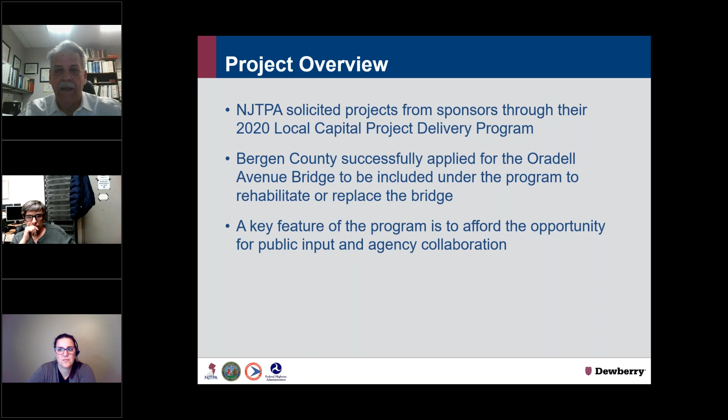As I mentioned, and you'll hear throughout this, a key component of the NJTPA's program is making sure that the public is contacted and that there is collaboration between the public and not only the agencies, but this team.

We're really early on in the project's life. We're in the concept development stage, so we are here gathering information, gathering physical data in the field, and assessing the condition of the structure itself. We're making sure we gather information regarding not only the physical elements, but also the environment the bridge is in, so that once we complete the concept development phase, the goal is to leave this phase and graduate the project.

We want to make sure there are no fatal flaws. We want to make sure that the solution arrived at -- the preliminary preferred alternative, as it's called through the local concept development -- has been vetted, is the most prudent and effective way to go engineering-wise, and that it has public support. So that when the project advances further into preliminary and final design, and ultimately to construction, there are no fatal flaws, that the public has in fact been listened to, and that the purpose for this project and its need has been effectively dealt with.

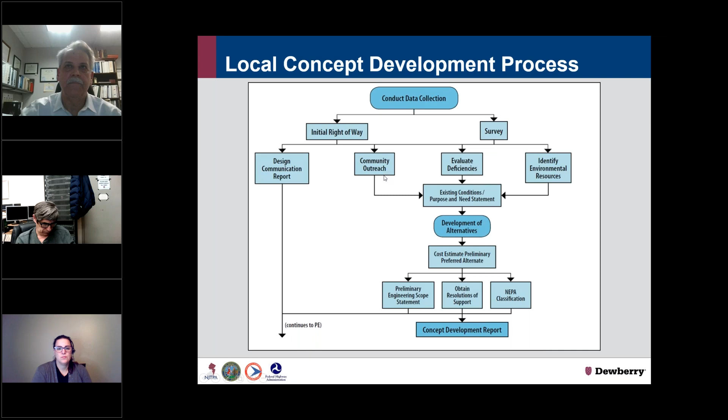Just another quick flow chart to show where we're at. If I drew a horizontal line across this slide, we're just above the development of alternatives stage. We can't develop alternatives until we gather data, and a big component of that is gathering community input. The project has federal funds, so we need to comply with NEPA documentation, which also stresses public input and community outreach. As we gather physical data on the site, that includes physical information regarding the environment.

As we'll get into, I'll show you some slides. This project site, probably as well as I do, if not better, since you're living in the community — our goal is to make sure we minimize or avoid impacts to the surrounding environment.

A quick overview before we get into the project itself. The Oradell Avenue Bridge, as probably everyone on the call knows, is a critical link because Oradell Avenue is a major east-west corridor, extending from Grant Avenue on the east side, crossing the Hackensack River, crossing Kinderkamack, and carrying traffic from the more heavily residential side of Oradell to downtown and the other residential side, but also carries traffic beyond to Route 17, the Parkway, etc.

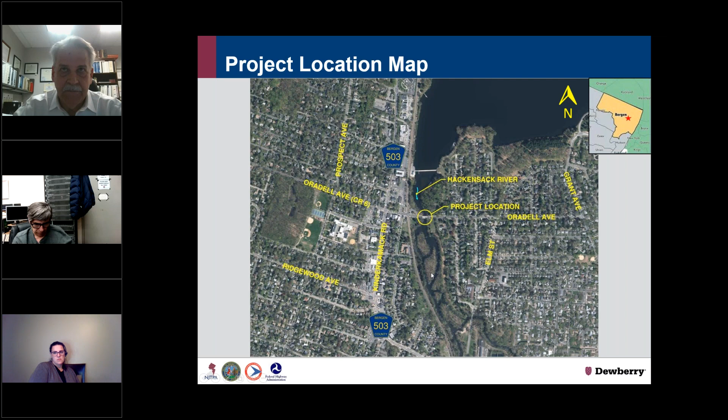Zooming in to the project site, this will give you a snapshot of the property immediately abutting the bridge. Again, it's dominated by the Hackensack River and the linear park, which is Bergen County owned property. The Oradell train station is immediately west of the bridge site, and the Pascack Valley line runs north-south immediately west of it. There are commuter lots, and a sidewalk carried along both the north and south side of the bridge for people who want to walk into town or to the train. So there's a lot of uses this structure is required to function for — not only vehicular traffic, but pedestrian traffic and utilities, as I'll show you in a bit.

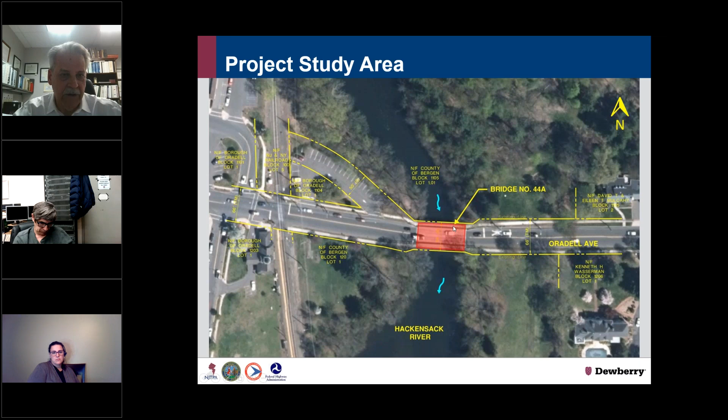The bridge itself was built in 1904. As bridge designers, we'd love to get 75 to 100 years out of a structure as the current goal, so this bridge has far exceeded that at 117 years. It's been rehabilitated over time — it doesn't last 117 years without some work done on it. Bergen County did work in the 70s as well as around 1995-96, but that's still 25 and 50 years ago. So the project is driven predominantly by the deterioration of the structure itself.

It's a single span bridge, but the overall length is about 100 feet, with a span of about 93 feet. It's what's called a through girder, and I'll show you a cross section in a moment — as you drive across the structure, you'll notice the two large green elements that stick up out of the deck. Those are the girders, the main supports carrying vehicular traffic down to the substructure.

The substructure consists of two masonry abutments that support the superstructure.

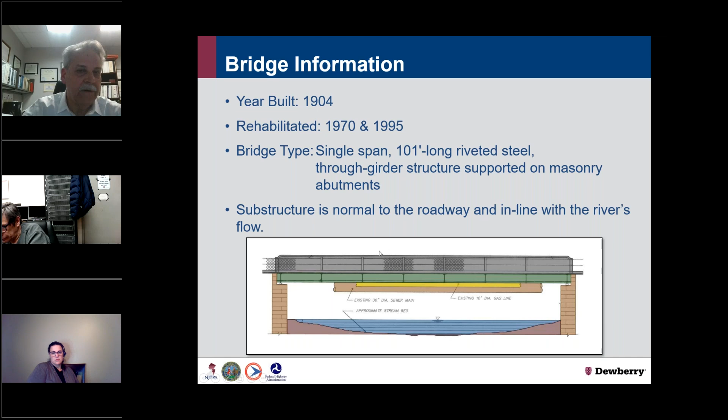The bridge carries Oradell Avenue, which has a 30-mile-per-hour speed limit. It does have a lot of traffic, 25,000 vehicles per day. It's a heavy corridor, and that is recognized.

The bridge itself is a little bit narrower than the approach roadway. It's only about a 29-foot clear roadway, where the roadway on either side, curb to curb, is in the neighborhood of 40 feet. This is what I meant before when I called it a through girder bridge — you'll see two main elements, the two main supporting girders that carry the vehicular traffic, support and deliver the loads induced on this structure down to the substructure, down to those masonry supports.

Outboard of the vehicular traffic, there's a sidewalk on either side to carry pedestrians. As I mentioned, this bridge also supports utilities. There's a 36-inch sanitary main supported beneath the deck, and there's also a gas main supported on the bridge.

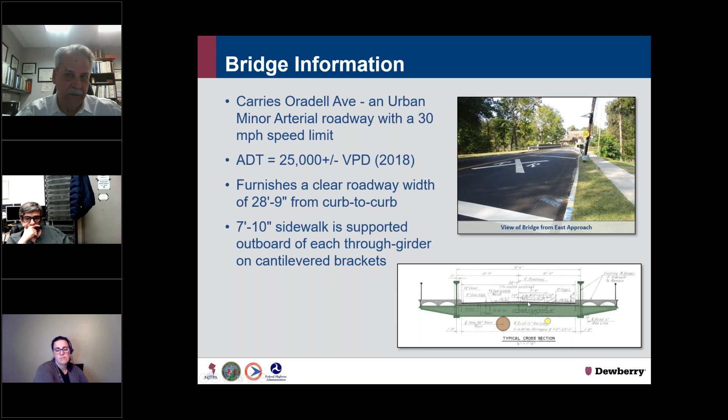As I mentioned, a little bit about the project site itself — we know that the bridge is critical, it's a vital link in the area. It's surrounded by property owned by Bergen County. The Hackensack River stretch here is in essence a park, but it's dominated by the flows of the Hackensack River. The areas surrounding can also be potential sites for endangered species.

Often we will look at bridges that are on the navigable waterways as having tidelands grants. So that's also an influencing factor that we will look at.

In addition to the physical environment, there's also significant cultural resources in the area. Although the bridge itself is not considered eligible for listing on the National Register, it is within the immediate confines of other historically significant elements — one being the Oradell Railroad Historic District, and there's also an Oradell Avenue Grove Street Historic District that is there.

So as we're developing alternatives and coming up with solutions for how best to address the condition of this structure, the project needs to account for these natural setting environments, not only the physical environment but the built environment, to mitigate any impacts on those elements.

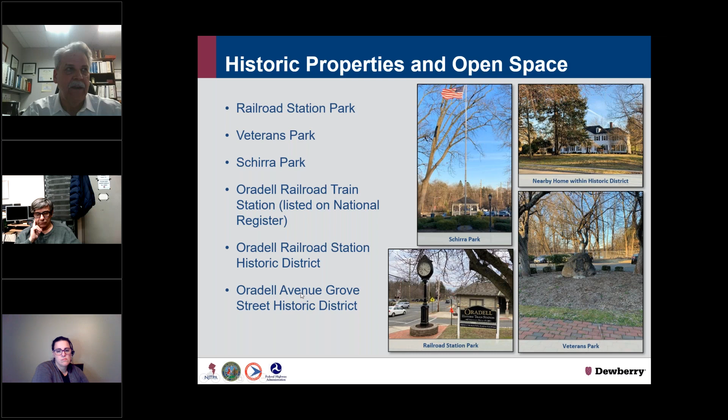In addition, I mentioned that not only is the property along the river a park, the area abounds with parks. This tiny little area between the commuter parking lot is actually a park setting. Wally Schirra Park is immediately west of the railroad station as well. So those are also historic or significant properties that need to be mitigated in the event of any impacts to them.

Just wanted to show you a quick constraints map, as we call it. This map basically zooms in on the area around the bridge. Everything shown here is information or data that's readily available to us from the NJDEP's website and database. You can see again how the area is dominated by the Hackensack River, and as expected, that corridor along the river is potential habitat for endangered species and nesting birds, which all need to be weighed in as we develop alternatives.

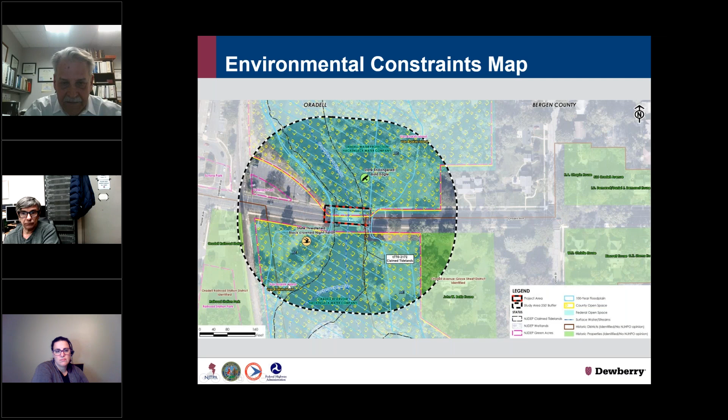As I mentioned before, we've got commuter parking here, as well as further in across the tracks. This tiny little triangular property here is actually park, as is all the abutting property.

Just a few general photos of the project site — looking east from the bridge, looking west from the bridge with the railroad to show you the immediate proximity of the railroad. There's also the immediate proximity of the driveway that provides access to the local community parking, and this is the area of the park.

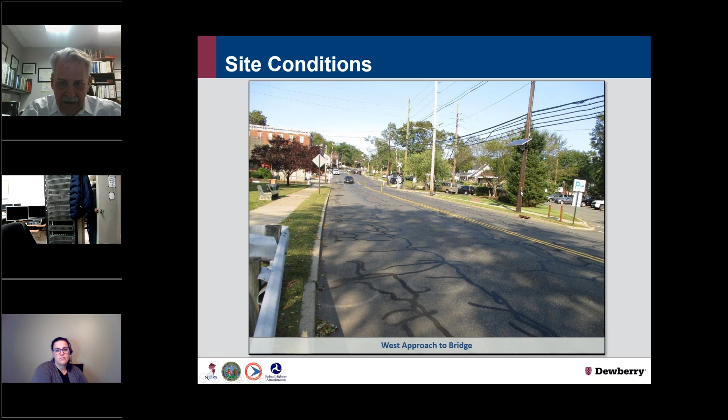Now, as I mentioned, the bridge also supports utilities, which are critical. So it serves not only as a link for vehicular traffic, but also a link for utilities. It carries a large sanitary sewer main, in addition to the gas main, and there's also a water line that actually extends below the Hackensack River on the north side of the bridge.

These are also elements that, as we're developing alternatives and investigating this structure, we need to make sure we accommodate. These are all vital utilities. We work with the owners, we speak to them, we gather what information we can, so that as we're weighing the pros and cons of alternatives, these are accounted for.

As I mentioned, there are two utilities already supported on the structure. There's also overhead lines, which must be accommodated. You can imagine working on the structure with these lines immediately adjacent. We have to avoid impacts not only to the physical lines, but also make sure we comply with high voltage proximity acts, etc.

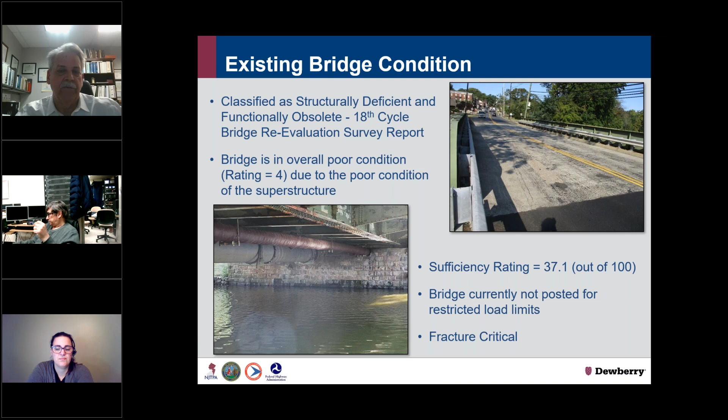The bridge has 2 main carrying girders, and as such it's identified as a fracture critical structure. That means simply that if one girder were to fail, the system has no redundancy — the loads that girder carries aren't transferred to any other member to carry them down to the substructure. In essence, the structural system fails. That's why 2-girder systems are more of a concern to bridge engineers than multi-girder systems, which have that redundancy.

Again, the project today is being driven by the condition of the superstructure of this bridge, the physical condition of the girders that have been here since 1904. Just because they've been here since 1904 doesn't mean we should get rid of the structure in its entirety, but we need to be cognizant of what's driving the conditions.

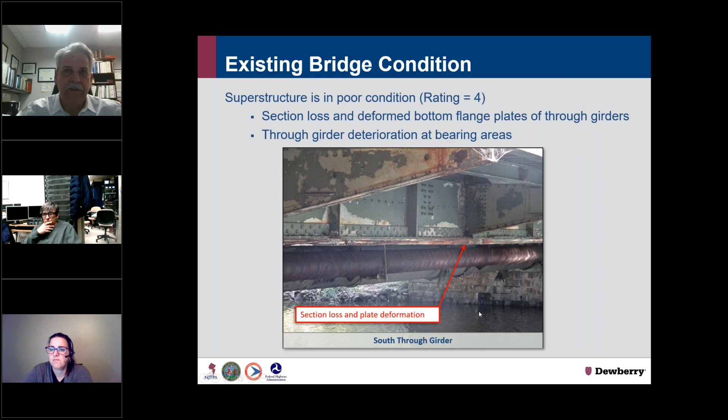The structure itself, as you can see here, is as you'd expect — anything that is steel and exposed to the weather for 117 years is going to be subject to deterioration. You get what's called pack rust; you can see this is a built-up member, and that rust causes problems with steel members, as you all know. The masonry substructure is also being eroded.

The bridge passes a lot of water that comes down over the spillway from the Oradell reservoir and sees high flows. Over the years, those flows erode the stones and the mortar, and you see signs of degradation as a result.

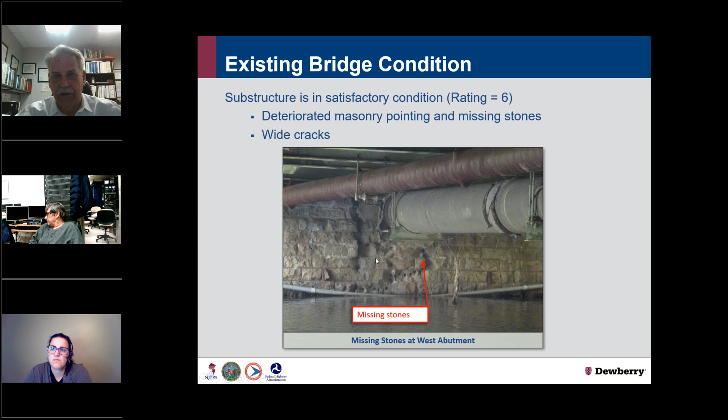Now, as I mentioned, we're here because we've started this data collection process. We've developed a public involvement action plan, which said we need to make sure we go out and speak to the public. We met with local officials and got their initial concerns, and then met with stakeholders, as Nicole said. We're here tonight to do that exact same thing with you — to solicit your input, answer any questions we can, and make sure your voice is heard and involved in this process.

Some of the concerns that local officials, stakeholders, utility owners, and the public in the immediate proximity raised are likely the same ones you have. Closing this bridge long term is a significant concern — everyone uses the structure, and you want to see traffic flow maintained and pedestrian service maintained across the river. Another key issue is emergency service: emergency services in Oradell are located on the west side of the river, yet there's a huge residential community on the east side.

We want to make sure that those emergency services are addressed as we develop these alternatives. Similarly, you've got schools on both sides. St. Joseph's School was one of the stakeholders who participated in our last call. We heard from them. We wanted to make sure that New Jersey Transit's operations are also not impacted, not only from impacting the transit itself, but you also have commuters that use that line.

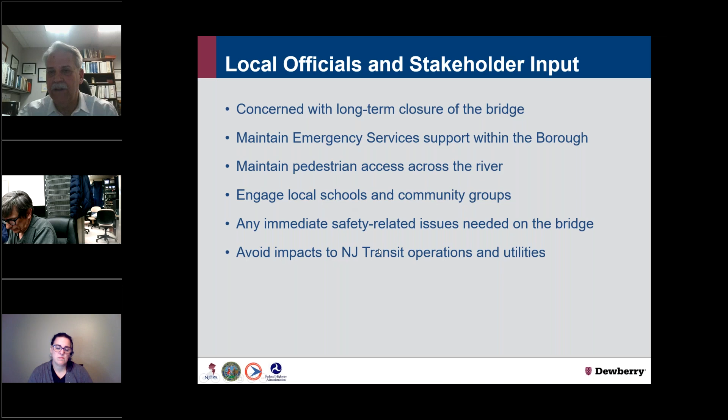I highlighted a little bit earlier about purpose and need, and it being a critical document for us to develop. Purpose for projects that are bridge related are often very easy to document. It's generally driven by the condition of the bridge, and that's what's driving this project. That is in essence the purpose of this project, to make sure that the structural integrity of the bridge is maintained and or restored so that there are no more concerns about it for the next 100 years.

The bridge is also defined as functionally obsolete, and that's being driven solely by the fact that the approach roadway to it is 40 feet and we're necked down to about 30 feet. So that necking down causes the bridge to be classified as functionally obsolete. That's less of a concern, if you will, than the structural integrity, for obvious reasons, but it still is a driving factor for the purpose of the project.

The items that are identified as need are items that justify the purpose of the project. In other words, what's the evidence that there is a problem? Well, the county is required to get biennial inspections on their structures every two years, obviously by the name biennial, to ascertain the condition of that structure. The results of that then formulate not only the condition rating of the structure, but its structural capacity to carry loads. And then again, that gets into developing the sufficiency rating.

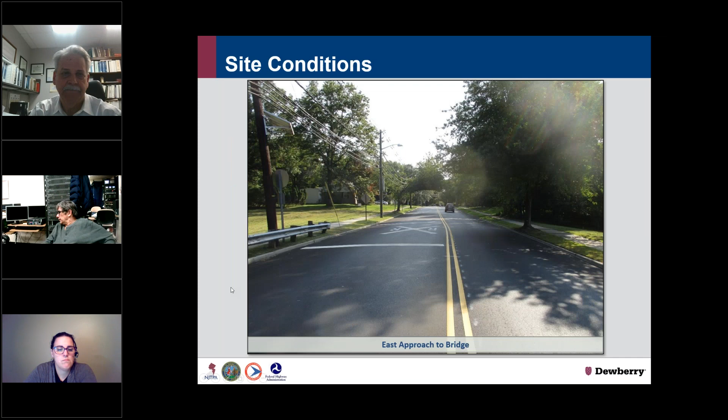As Rick mentioned, we are now in the local concept development phase, and we will be here for a good year to year and a half. The next phase is preliminary engineering, then final design, and then we get to construction. That period often takes many, many years to get to, and it also requires funding.

So one of the questions is, would there be a time period where utilities would have to be shut off to residential homes in the area, for instance sewer, gas, electric, etc.? How long would you anticipate it taking to plan the new bridge and receive funding and permits before construction actually starts? Okay, let's do the straightforward question first.

As part of this phase, we coordinate with all the utility owners. Just like finding out facts about the bridge and the environment, we want to make sure we have information and contact with those owners to determine, in the event that we need to temporarily de-energize or shut them down, do they have an alternative way to make sure public services are maintained? That's the primary goal.

So if the concern is, will we lose our power, will we lose our water, will we lose our sanitary - that will not happen to the extent that it causes problems, is the long and short of it. We will work out accommodations preliminarily, or concepts, in this phase. Those will get carried forward. Everything done in this phase gets documented in what's called the concept development report, so that as we move forward, the information and discussions we've had with those utility owners carries forward through those phases. We don't want to get to a subsequent phase where there's a fatal flaw and we say, oh, we forgot to talk to Suez about their water lines, and now we have a problem - what are we going to do? That's the whole premise of why this phase takes long. We want to make sure we don't miss anything.

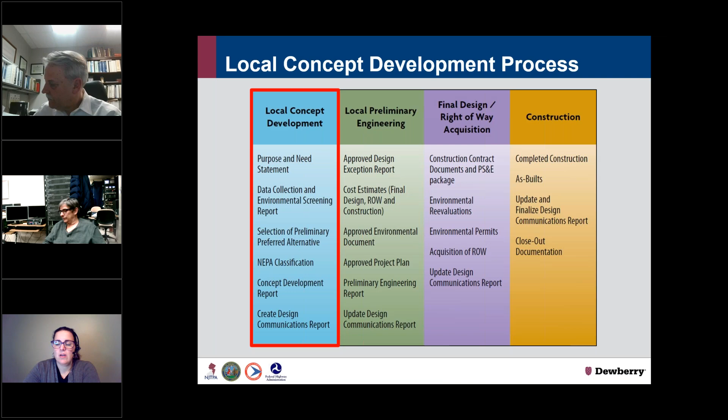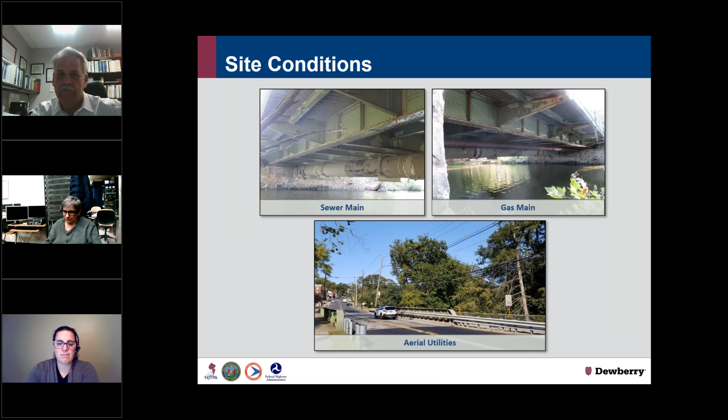Now we can go back to our purpose and need slide, and now is the time we can open up the discussion a little bit and ask people to either type into the chat box your question, or type in that you would like to be unmuted to ask the question verbally, or you can turn your camera on and wave to me and I will call on you to get your questions answered.

But we have the goals and objectives up on the screen here as well, and this is something that the team is looking for your feedback on. Those goals and objectives are to maintain vehicular, pedestrian, and bicycle traffic during construction, to maintain emergency services support within the borough of Oradell, to avoid impacts to NJ Transit's Pascack Valley line and utilities, to seek to identify an economically viable method of expedited construction, to avoid or minimize social, economic, and environmental impacts, and lastly, to accommodate multimodal users and ensure ADA compliance.

So does anyone who is participating tonight have any thoughts or feedback for us in regards to these goals and objectives or the purpose and need statement?

I see we've got another question in the chat box: Are you considering banning disruptions to the road usage on Oradell Avenue east of the bridge? This road has been dug up by utility companies repeatedly over the years. It would seem to me that you cannot have additional disruptions while this construction to the bridge is going on.

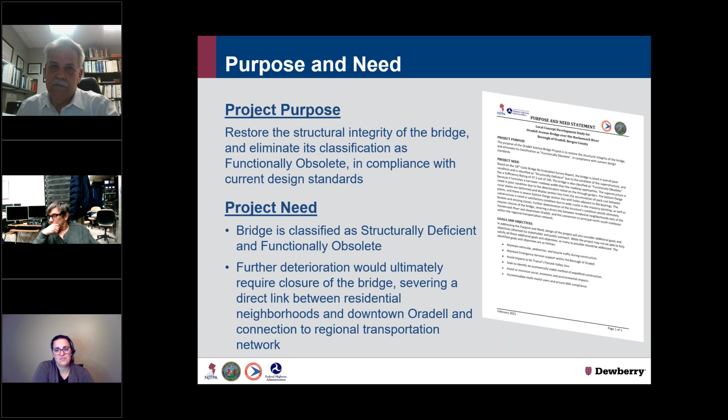I just wanted to assure Council President Schoenberg that we raised these concerns very early on in our initial meeting back in November. And we explained very clearly to everybody involved that we have had situations where the Elm Street Bridge is unavailable. And if this bridge were out while the Elm Street Bridge is washed out for some reason or underwater, there would be no access whatsoever between the two sides of our town. And we had emergency services on at that call as well, police and fire. And I think that's part of the reason that they include that as one of the concerns in this process.

Yes, we definitely heard that loud and clear, as would be expected. There are certain goals and objectives that, regardless of any project, anyone can look at and say, these are concerns. You don't have to be a bridge engineer or a civil engineer. It's just, I hate to say it, common sense.

Another question in the chat box asks: if the bridge were to fail before all of the planning phases are complete, are there methods to fast track a replacement? Well, that's probably a little bit premature, because that's why the project has started at this time, as opposed to later, the goal is to avoid that situation. That's why the project was brought forth, I'm sure, by Bergen County, to get the funding implemented so that they could look at this so that they don't end up in that situation.

There's always, should something actually happen, options to consider, there are temporary bridges that can be installed, can be rented and installed at a moment's notice, those types of things. So the goal of this project and this process, if you will, is to avoid that type of scenario.

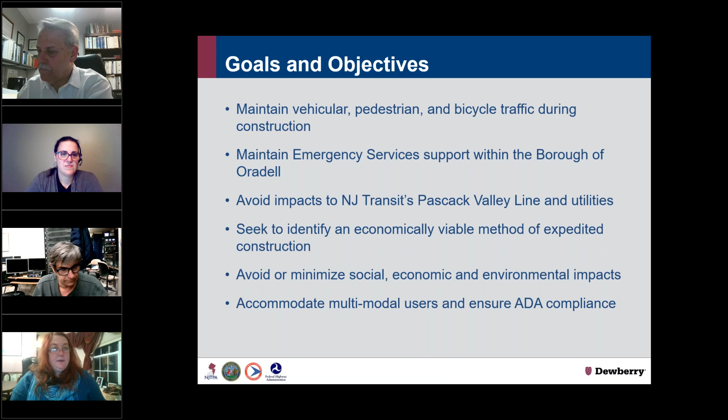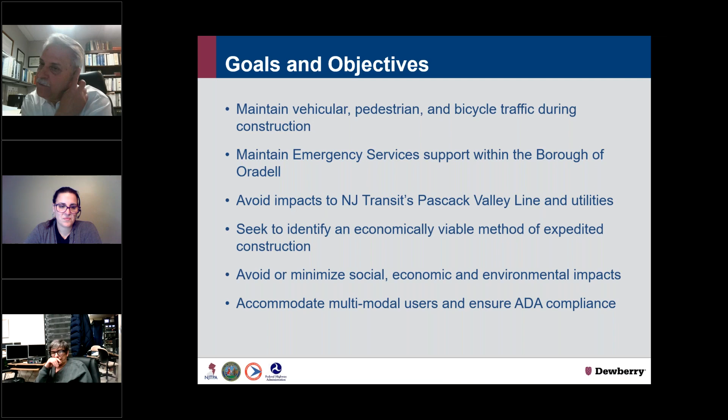Rick, does that meeting have to, do we all have to be here till 8 o'clock? Or if no one has any questions, do we adjourn, or do we just need to be here till 8 o'clock? What's the procedure? I'm not sure, Sasha, maybe you can shed some light on this. Yeah, my understanding, Joe, is we need to remain here in case someone should get on at, say, 5 of 8 even and want to raise a question. Even though we're virtual, it's much like if we were in a public setting where people could come at whatever time is convenient for them, is my understanding.

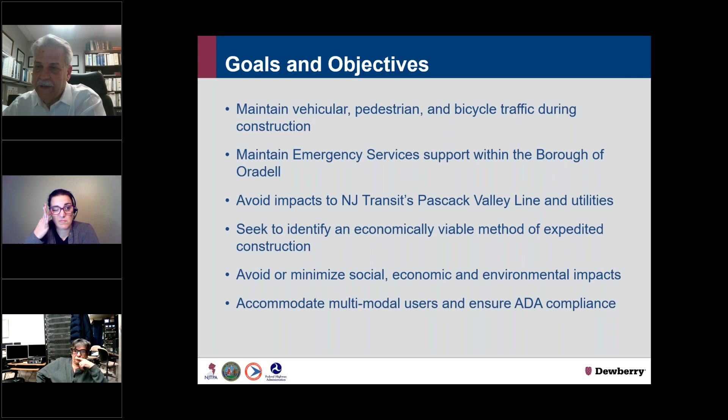So, depending on what everybody else's schedule is, I am fine waiting through to 8 o'clock. That's not a problem. Everything is recorded, and Nicole will be here with me at the very least, so we would document any comments we receive regardless. That's probably the big thing. I know it's hard for a lot of people to stay on, not for 2 hours, but even for the public, they may just have only a certain window that they can jump on, make their comment, and then jump back off, and that's fine.

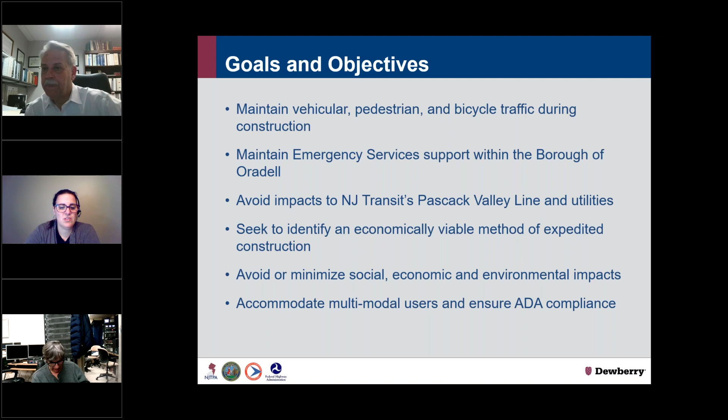So Adam and Martin, you don't have to stay here. I'm here, so you guys are free to do whatever, and we will be here till 8 o'clock. And Rick, we'll leave the, can you go to the last screen, which has the contact information? And we'll leave that up. Yeah, I should—Joe's email and my email. Yep. And Nicole, I'm sorry, Rich, Mayor DiDio here.

Just to reiterate that there will be comments through April 26th, because this slide is up now and people may not have heard it earlier. Correct. Thank you. Yes, I was just going to say that same thing. For the life of me, couldn't tell you why I missed vetting that. I apologize. That's okay, you probably looked at it so many times that it just didn't jump out at you. That's okay.

Well, if Martin and Joe are still on, first of all, we appreciate your kind words, Joe, for the work we've done so far. It's been our pleasure. And like I said during these presentations, I'm here kind of as the point person, if you will, but by all means, do not feel like—as I've tried to say as we've gone through these presentations—I don't want to speak for the county. So as I'm sure you both know, you have absolute control and right to jump in at any time to clarify some of the statements. I want to make sure we get the right message out to everyone. And there's certainly a lot more involvement that I may not know about. So I just want to reiterate, please feel free to contribute, to answer, to weigh in as you both desire to.